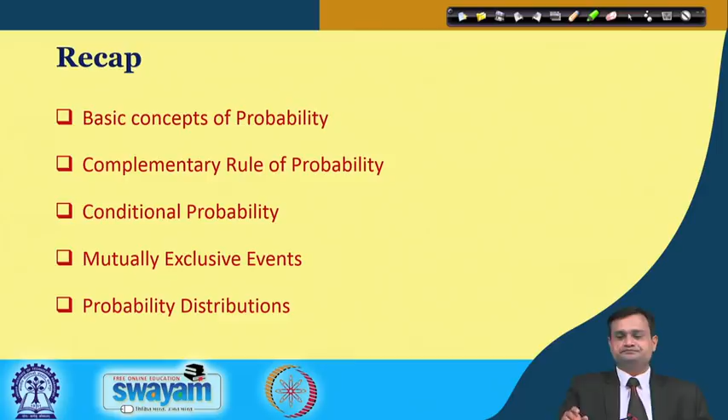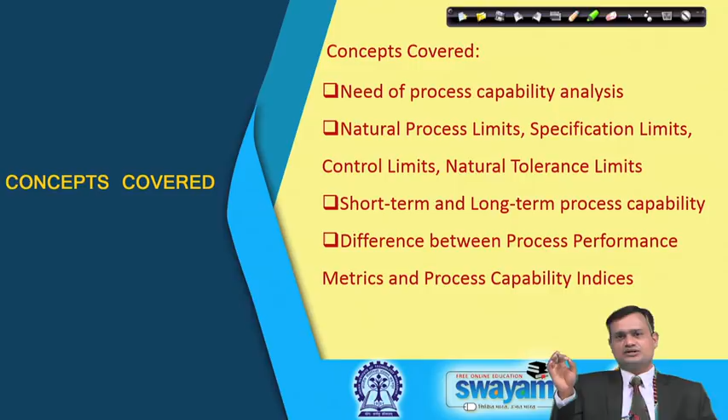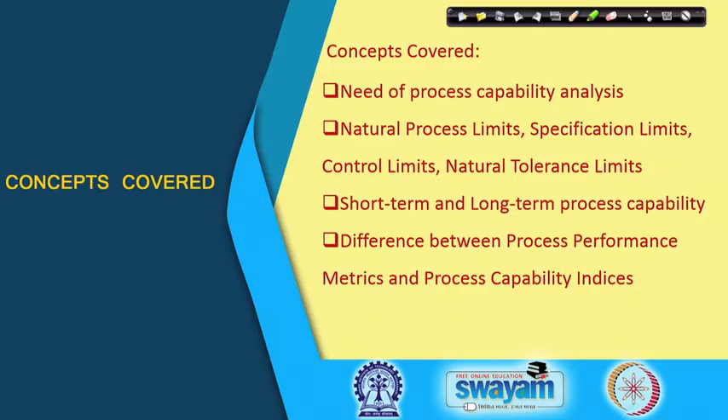This lecture will focus first on what is the need of process capability analysis, natural process limits, specification limits, control limits, tolerance limits, short term and long term process capability, and the difference between process performance metrics - we have seen many like DPMO, DPU and others - and if all those measures are there, what is the need of some other measures like process capability indices. We will see some of the important issues in this lecture.

So the first question: what is process capability? You can see the line in bold underlined. Process capability is defined as the inherent variability of a characteristic of a product. So when I am trying to analyze and capture this inherent variability of a characteristic of a product - characteristic may be diameter, thickness, whatever is your interest of measurement - then I am concerned about the process capability.

Typically it is expressed as 6 sigma, and sigma is the sample standard deviation of the process which is under statistical control. So it is very important to first check whether my process is under statistical control or not. If it is so, then only there is a point in conducting the process capability analysis. If there are any assignable causes which can put my process out of control and I am conducting the process capability analysis for such a process, it would be misleading.

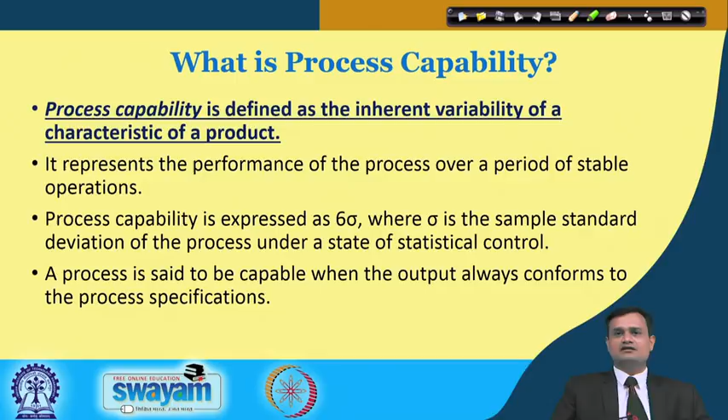So first I must bring my process under statistical control, and then I should see what my present process capability is and how it can be improved. A process is said to be capable when the output always conforms to the process specifications.

Why to study? The reasons are many. Just to summarize a few: predicting so as to hold tolerances. Many times designers give the tolerances, but my processes are not capable enough to meet those tolerances.

In this case, I can have an idea of what is the capability of my process and to what extent it can meet the tolerances defined by the designer.

Assisting developers and designers in selecting and designing the processes, because now you know what is the process capability. Establishing interval between sampling is also very important. I want to draw the sample to analyze, but I must see what is the stability of my process and capability. This gives me a fair idea about deciding the interval between the samples.

Specifying requirements for new equipment. So you want to purchase equipment to meet certain standards and produce a product with certain specification. It is important to see what is the capability of this particular process, basically an outcome of a particular instrument. Selecting between vendors.

This is a very important point. Do not think that the final product, if Maruti is selling to a consumer, is just an outcome of Maruti company itself. Maruti purchases components from various suppliers and vendors, and it is important for Maruti to see how capable their processes are. If their processes are not capable, they are producing more defectives, parts are costly, or the parts are of lower grade, and when this is passed on in terms of cost and quality to Maruti, it will have an impact on the final product price or the quality.

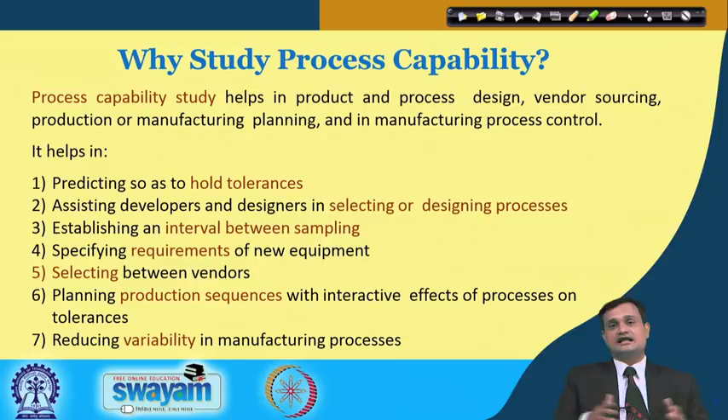Sixth, planning production sequence with interactive effects of process on the tolerances and reducing variability in the manufacturing process. So there are various reasons why one should conduct the process capability study, and there is a trigger for when I should really go for process capability.

Prior to taking delivery of any new process equipment, this is the first prerequisite requirement that I should conduct the process capability study. Second, before approving newly installed process equipment for production use, let me first see the process capability and then go for full-fledged production.

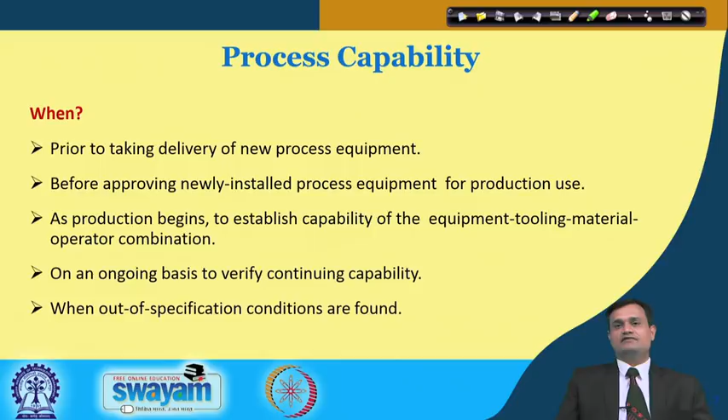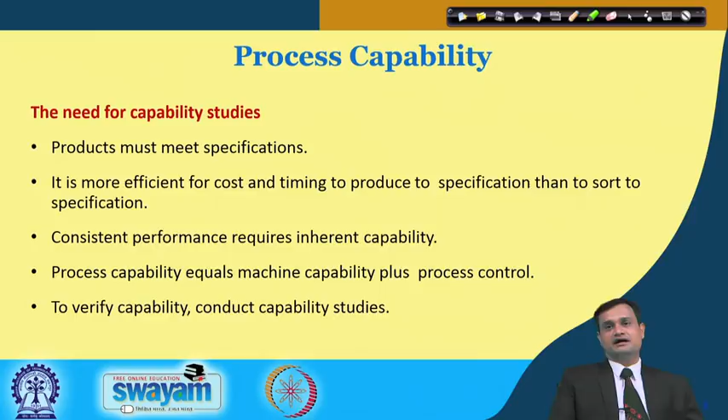As production begins, to establish capability of the equipment, tooling, material, operator combination, this study is required. On an ongoing basis, to verify continuity or continuing capability, process capability analysis is necessary, and also when out-of-specification conditions are found. So we have seen the need of process capability, basically to understand better how my processes are capable of meeting the specifications, and if there is any shift in the process mean, we will see its effect through figures on my defect rate or the generation of defective items.

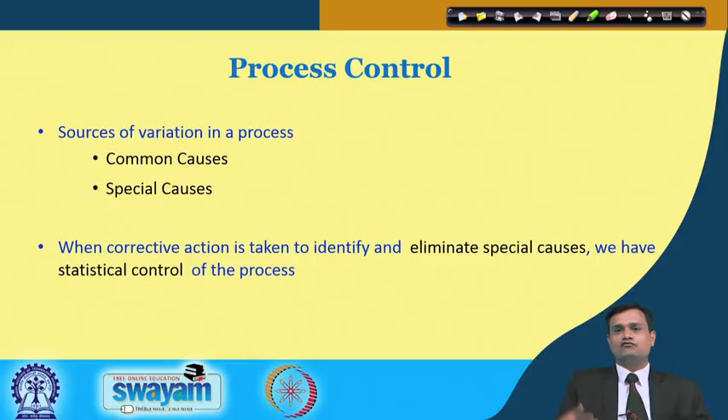Before we extend our discussion, there are some basic concepts to appreciate. When we say statistical control or process control, always remember you cannot avoid all variations, and typically the variations are primarily because of common causes and special causes. If there are variations because of common or chance causes, such variations are within control and I do not bother much about them. But if there are special or assignable causes, then some corrective action is required, the process needs to be readjusted or corrected, and then only can I go for the process capability analysis.

This is very interesting to appreciate. Just see that you have the process typically out of control. This indicates that there is a special cause present. Why is this out of control? You see there is a mean value, a mean line, and this process is drifting from this side to that side, with also a huge variation in terms of process variability.

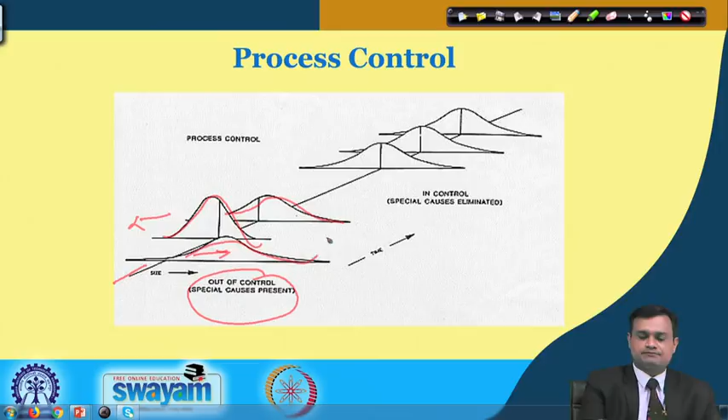If you look at the process in control, then more or less you will find that process variability remains the same and your process is centered at a particular desired value. So you have the process which is in control, and a process which is out of control, and it is necessary that first you bring your process in control and then only go for the process capability analysis.

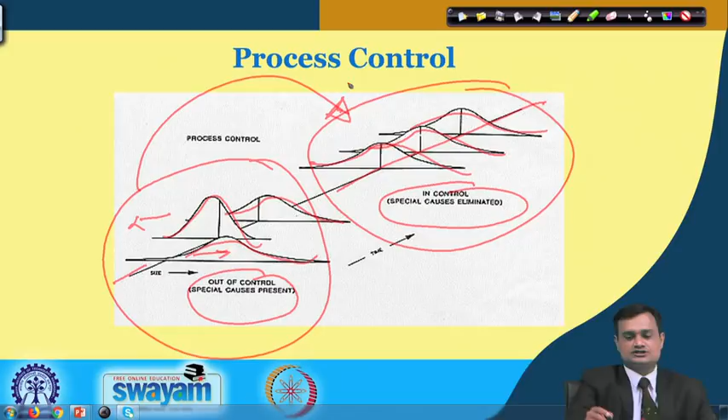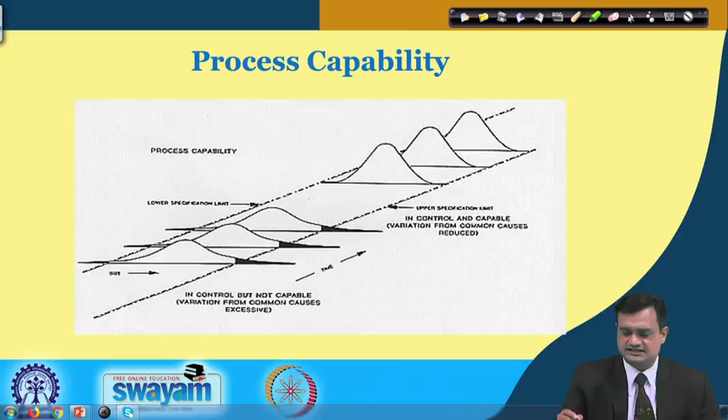So, I hope this would have cleared your understanding on what is the process which is in control, statistical control, and it is capable or not capable. Process capability basically indicates the performance of the process or the capability to meet the customer expectations, and it measures the uniformity of the output, covering both natural inherent variability at an instant of time and variability over a period of time.

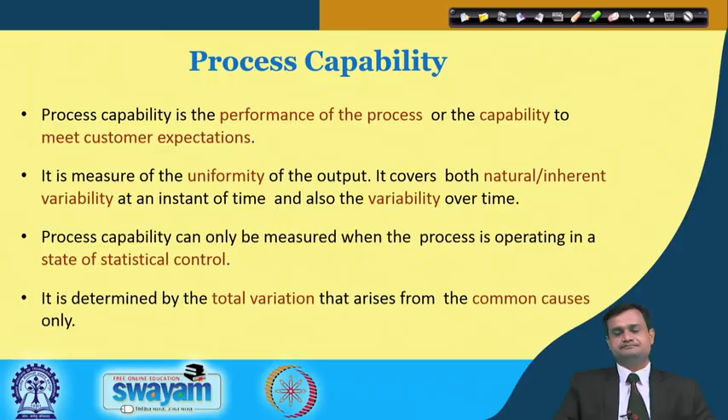Now, I would like to introduce a couple of important terms. Natural process limit is one of them. Natural process limits are known by several names, typically natural process variation, normal process variation, natural tolerance, but basically they convey the same thing.

Typically, in all cases it's plus or minus 3 sigma limit, 6 sigma is the total spread on either side of the mean around the process average, and such limits basically include 99.73% of the process variation and are typically said to be the voice of the process. If you recall, we discussed voice of the customer. So, that is okay, the customer can have a voice, but your process also speaks, in terms of control, rejections, defectives, and we need to capture this voice also.

So, Shewhart, the godfather of statistical process control, quality control, proposed plus or minus 3 sigma limits as an economic trade-off between looking for special causes for points outside the control limit when no special causes existed, and not looking for special causes when they did exist.

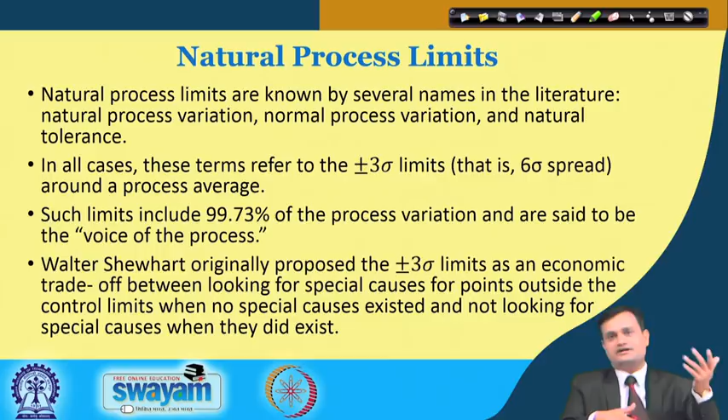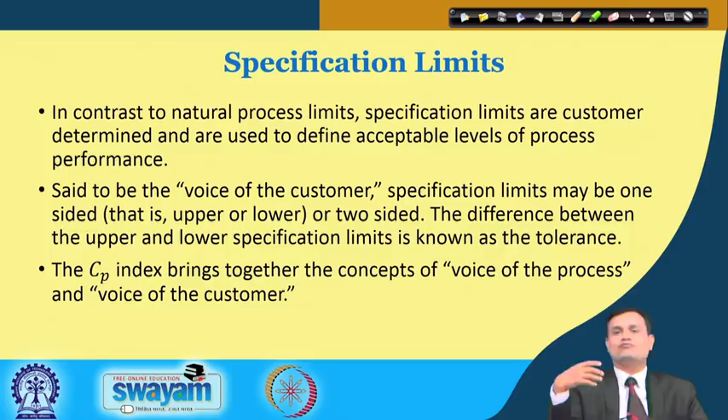Now you have another term, that is specification limits. Specification limits are determined by the customer, given by the customer, and these are used to define the acceptable levels of process performance. My process should deliver the product which is acceptable to my customer, and my customer believes in the specifications. So I must have the process, voice of the process, capable enough to meet this voice of the customer, that is the specification. So there is a one-to-one relationship between VOP, voice of process, and VOC, voice of customer.

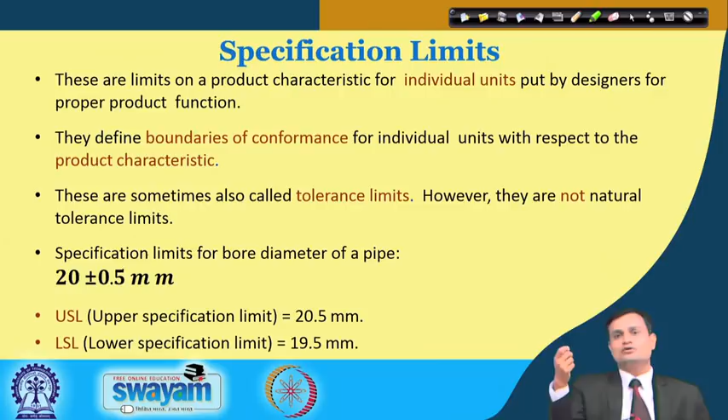So just see the example to clarify specification limit. There are limits on a product characteristic of individual units put by the designer for proper product function. Suppose I say the diameter of the pipe is 20 plus or minus 0.5 mm, then the upper specification limit is 20.5 mm, and the lower specification limit is 19.5 mm. My process must be capable enough to produce the pipes as per such a specification.

Now there is another issue, sometimes we talk about control limits, sometimes specification limits. What is the difference? Specification limits relate to the need of the customer, given by the customer, which are analyzed and built into the design. These are limits on a product characteristic for individual units put by the designer for proper product function.

Now, if you see the control limit, they identify the variations that exist between samples or subgroups of measurement, and they do not apply to individual units unless the control chart is for individual measurement. So, in summary, control limits reflect the variability of the process. I must try to control the variability of the process, and they have no relationship to the specification limit which relates to the need of the customer.

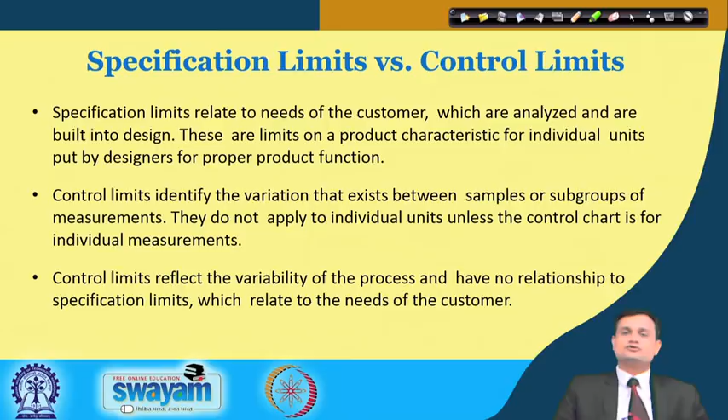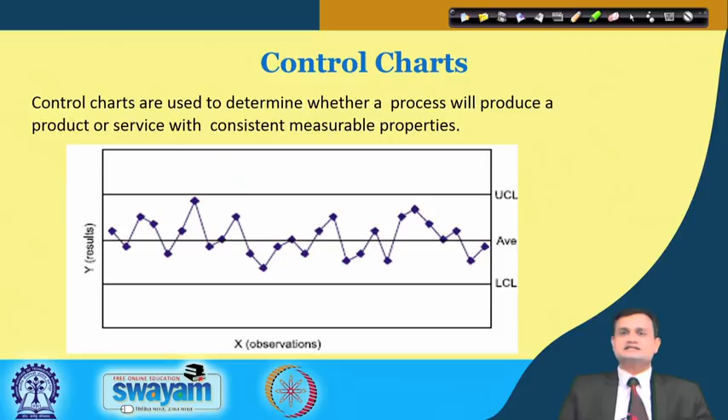We will see in detail the control charts, but since we are discussing control limits, let me say this is a typical process where you take X observations and get Y results. I would set an upper control limit, lower control limit, and average, and so long as the variability, as seen in the plot and data points, stays within this limit without depicting a particular pattern, I can say my process is within statistical control.

So you have control charts for variables. We have a session on this. X bar chart and R chart are used for variables to monitor different parameters. X bar and R charts reveal different problems - you can have statistical control on one chart and out of control on the other. Let's look at the figure here.

This figure depicts a process typically shown by a bell shaped curve with a mean of 16. I have another process with a mean of 15.9. When I put the X bar chart and R chart together, I can see that on the R chart the measurements are within the limit, but on the X bar chart, this measurement falls outside the lower control limit. So there is a shift in mean detected by the X bar chart, not by the R chart. As we know, R is related to variability, X bar is related to the mean of the process, so this indicates a shift in mean.

If we see part B, I have a process described by a bell shaped curve with mean 16, and again mean 16 - there is no shift in mean. You will see the point falling outside the control chart on the R bar, indicating a shift in dispersion. My mean remains the same, but because of some reason the variability has increased - you can see in this graph the variability is different, here it is less, there it has increased. This figure helps you understand and differentiate the utility of X bar and R chart.

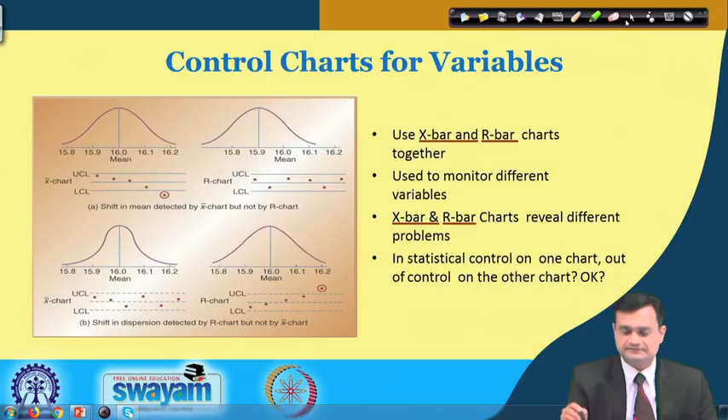So with control charts, as I mentioned, we typically deal with type 1 error and type 2 error. Type 1 error occurs when a process is thought to be out of control when it is typically in control, and type 2 error occurs when a process is thought to be in control when it is actually out of statistical control. Let's think more practically to appreciate the importance of type 1 and type 2 error.

Suppose there is a judiciary system and an innocent person is punished, declared guilty. This clearly indicates a type 1 error, because you are rejecting the part when it is of acceptable quality - you are punishing the innocent person when he is actually not guilty, and this is type 1 error.

Type 2 error is the reverse case, when you exempt the person, giving no punishment, when he is actually guilty. Many times it is difficult to see the trade-off between type 1 and type 2 error, and it is quite dependent on the context.

If you look at the judiciary system, should I accept a higher type 1 error or type 2 error? If you look at type 1 error, I am punishing an innocent person when he is not guilty - the societal cost is very high, and moral ethics will be diluted.

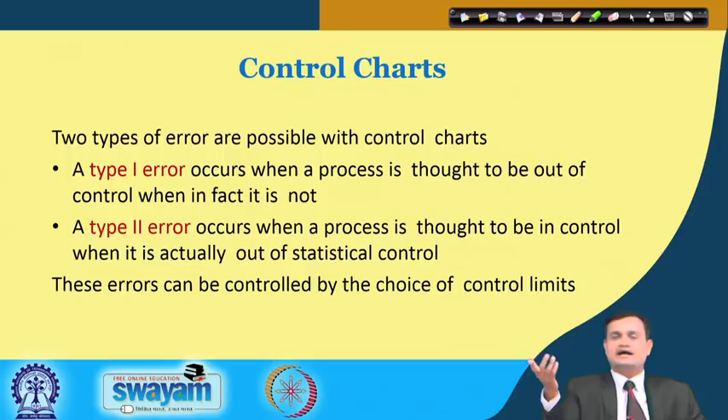So this is a trade-off and it is contextual. As I mentioned, Shewhart suggested the most economic trade-off can be achieved by having a plus or minus 3 sigma limit. Here we have compared specification limits versus control limits - you can see the lower control limit and upper control limit placed at plus or minus 3 sigma of X bar, specific to the sample, and here you have the lower specification limit and upper specification limit.

So please try to appreciate that the control limits are for the X bar chart, while specification is for individual values - these two are different things, do not get confused. Control limits are specific to the process, and their objective is to control the process. The specification limit's objective is to ensure that the parts I am producing satisfy the specification, which is basically obtained from VOC, voice of customer, given by the customer.

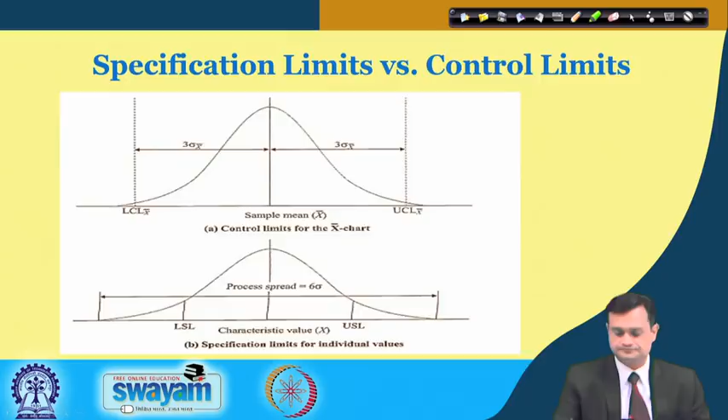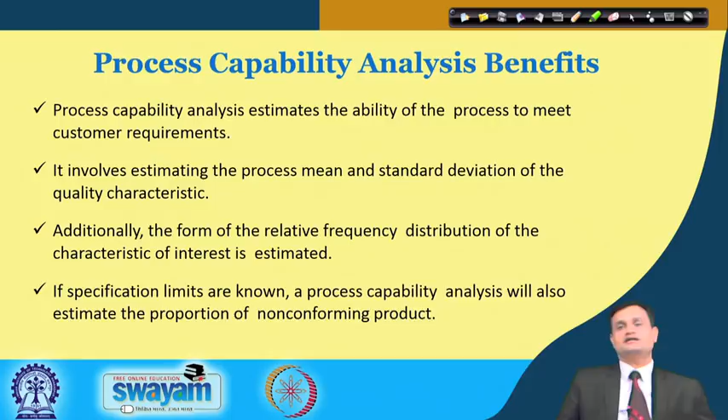The benefits we have seen are that we can be more confident in our process, and we can commit to our vendors and customers to what extent our processes are capable in meeting the requirement. Also, if we have a fair analysis of process capability, then we can take corrective action rightly, because the cost of scrap is much higher than the cost of rework. So many times, if altogether my components are going outside the control limit and I have to reject it, then it is better to take corrective action and put my process under the appropriate capability zone.

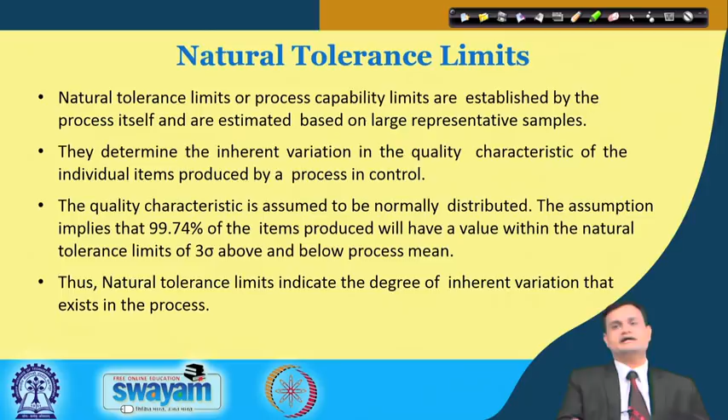There is another term called natural tolerance limit. Natural tolerance limit, or process capability limits - same thing - are established by the process itself and are estimated based on a large representative sample. Typically the assumption is that 99.74% of the items produced will fall within the natural tolerance limit of plus or minus 3 sigma, and this gives a good economic trade off. Natural tolerance limits indicate the degree of inherent variation that exists in the process.

So now you can see very well: upper natural tolerance limit or upper process capability limit, lower natural tolerance limit or lower process capability limit, and mu plus 3 sigma or mu minus 3 sigma is good enough to set my natural tolerance limit or capability limit.

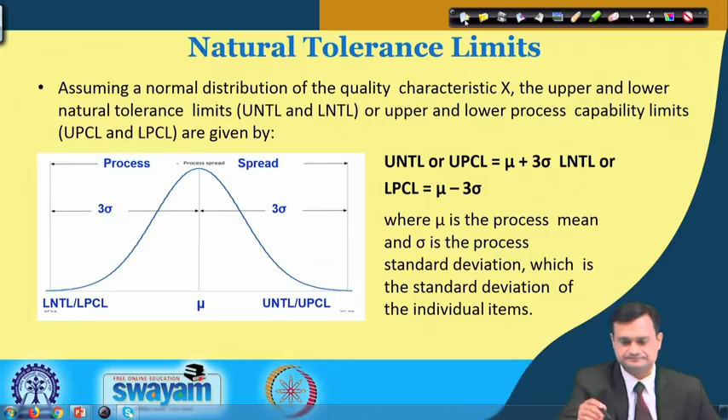So what we have checked our understanding with is mainly the bell shaped curve, the normal distribution, but you can have non-normal distribution, and in this case you need to find out the distribution of the data and ensure that the natural tolerance limits are so chosen that nearly the entire distribution is contained within those limits. Just to remind you, we have already discussed the relationship between mu and sigma through two different approaches: Chebyshev's theorem and the empirical rule.

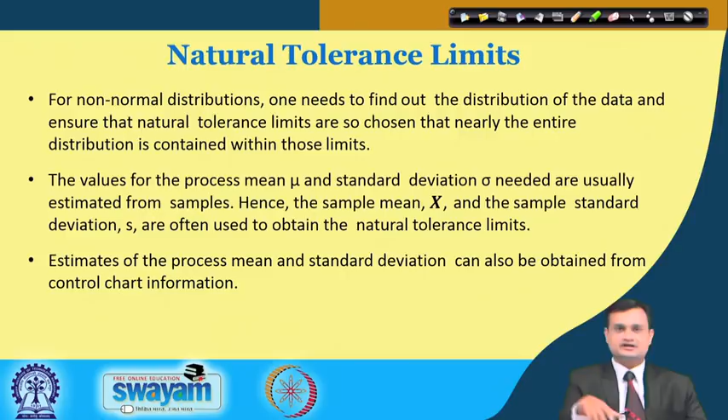You can appreciate the natural tolerance limit better through this example: let us say the diameter of a part has to fit an assembly and the specification for the diameter is 5 plus or minus 0.015. Samples are taken from the process in control, yielding a sample mean x of 4.99 and a sample standard deviation of 0.004. Now find the natural tolerance limit of the process, and would you consider adjusting the process center? That is the question.

So I have plus or minus 3 sigma as a rule of thumb. 4.99 is the mean of my sample, and sigma is 0.004. So what I get is 5.002 and 4.978, giving a process spread of 0.024. So for the current process, we would expect the diameter to fall between 4.978 and 5.002.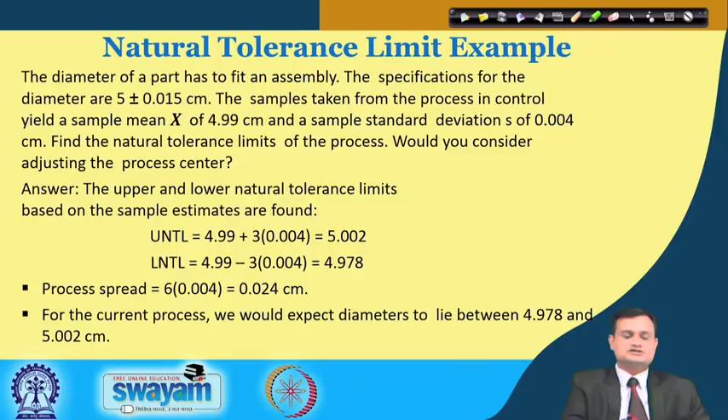Now just see here, it's interesting. I have upper specification limit 5.015, lower specification limit 4.985, upper natural tolerance limit 5.002, and lower natural tolerance limit 4.978. Now, given the mean is 4.99, if this is the present status of my process, you will see that this portion, highlighted in black, is indicative of defectives I am producing which are not meeting the lower specification limit. So this kind of process will have some defectives produced, and I should try to see that this can be avoided, because even if I go for rework the cost is high, and if I scrap, the entire value addition is lost.

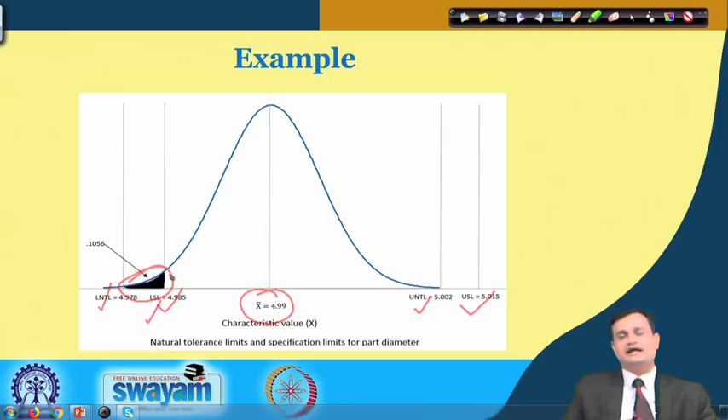Now I can take the example further. Z equals LSL minus x bar divided by S. Plugging in the values: 4.985 minus 4.99 divided by 0.004, which comes out to be minus 1.25. I can use the normal table and find the proportion or probability. So 10.56% will fall below LSL, and that I have to reject.

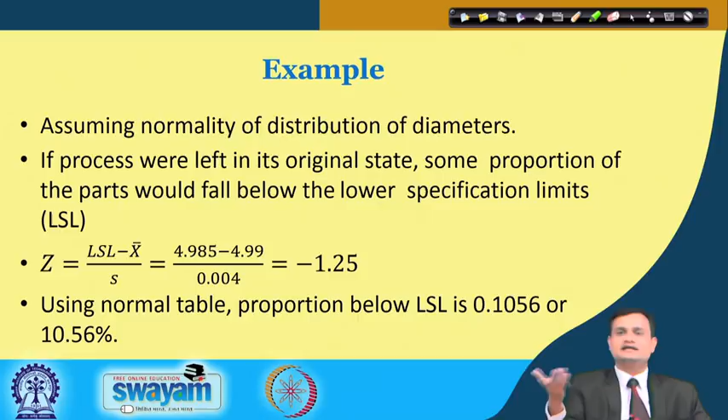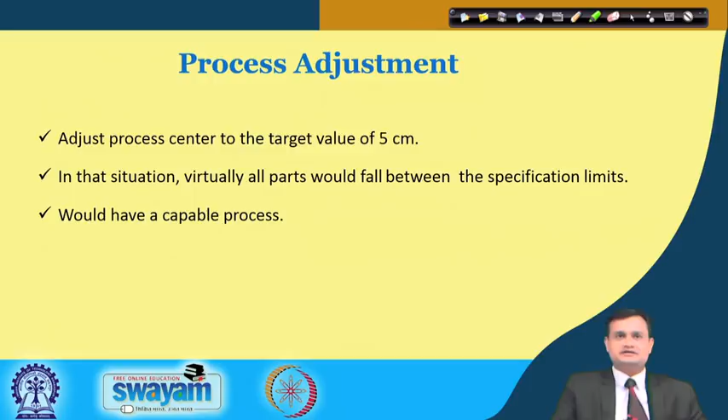So what to do now in this situation? Fine, I have measured, I have checked - now what to do? You have a couple of options. Number one, adjust the process center to the target value of 5. So you shift the process center, so that automatically your entire process gets shifted, and the probability of getting more parts outside the lower specification limit will reduce. In this situation, virtually all parts would fall between the specification limits and you would have a capable process.

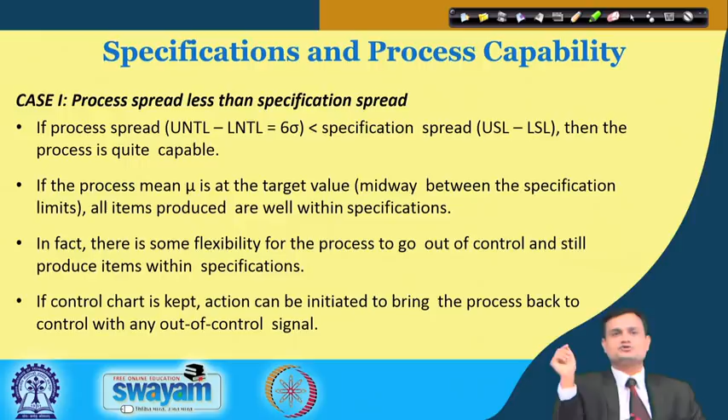So we can put it simply: in case 1, process spread is less than specification spread. So UNTL, upper natural tolerance limit, minus LNTL is equal to 6 sigma. If this is less than the specification spread, USL minus LSL, then the process is quite capable. We can see it further - process spread less than specification spread in all cases, and in the first case, process mean and standard deviation at target value.

Process mean and standard deviation are at the target value. Now the process mean has shifted a bit, but it is still within specification because it remains within the LNTL and UNTL. Here the process standard deviation has shifted, so you can see an increase in spread.

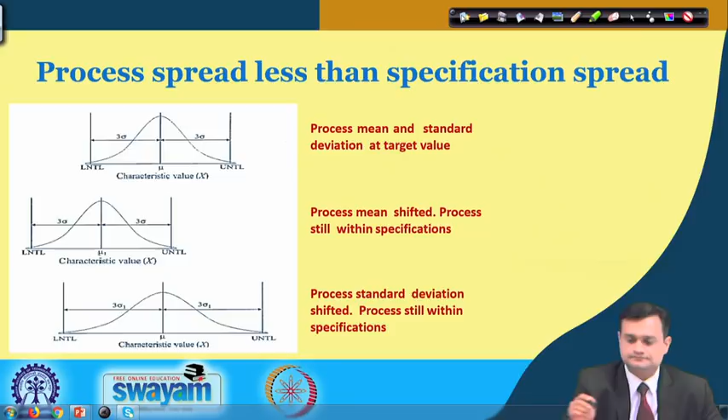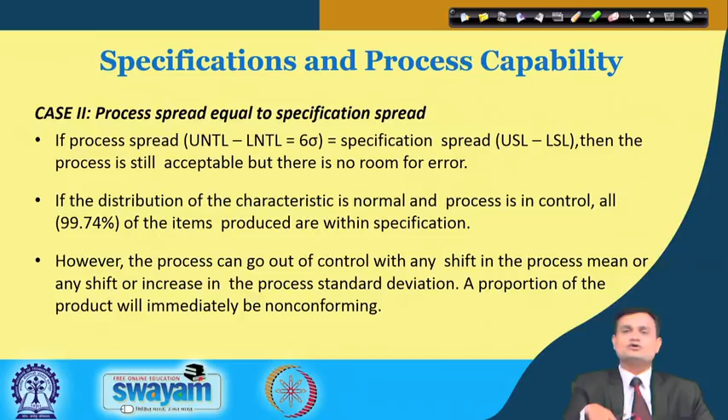Standard deviation has shifted, but the process is still within specification. So even with shifting in mean and shifting in variability, the process remains in control. Now let us describe case 2, where the process spread equals the specification spread. Here, UNTL minus LNTL equals 6 sigma, and this interval equals USL minus LSL.

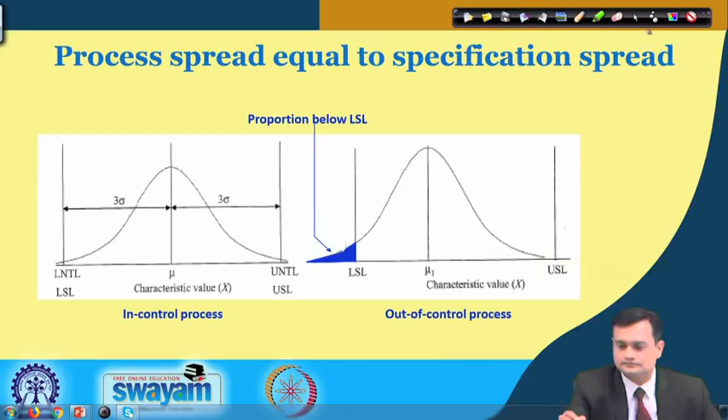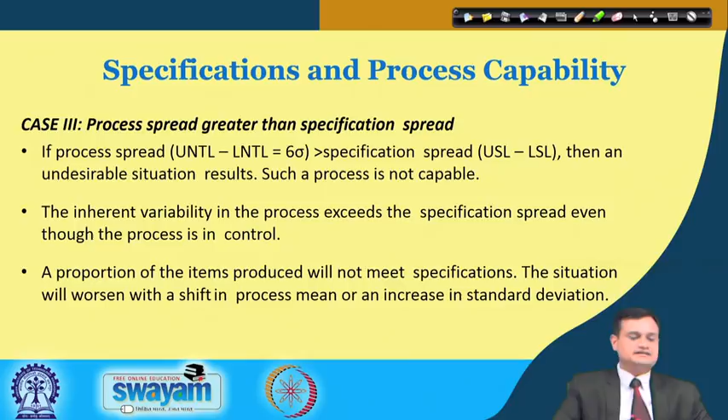Now we have case 3, where UNTL minus LNTL is greater than the specification spread, which is an undesirable situation. Here the specification limits are closer while the natural tolerance limits are wider. So whatever you do, the process is not capable and will produce defectives because the specification limits are closer. So now the question comes: what to do?

If this is the situation, what are the corrective approaches? When the process is neither capable nor barely capable, you have three options available.

Number one, explore the possibility of increasing the specification limits. Many times designers or customers are fascinated by specification limits that are actually not realistic or required. So can you really change or increase the specification limit so that it can meet your process capability?

If not, second, investigate measures to reduce the process spread. Try to make your process more centered around the mean value. Automatically your upper and lower natural tolerance limits will come within range, and you would be able to meet the requirement.

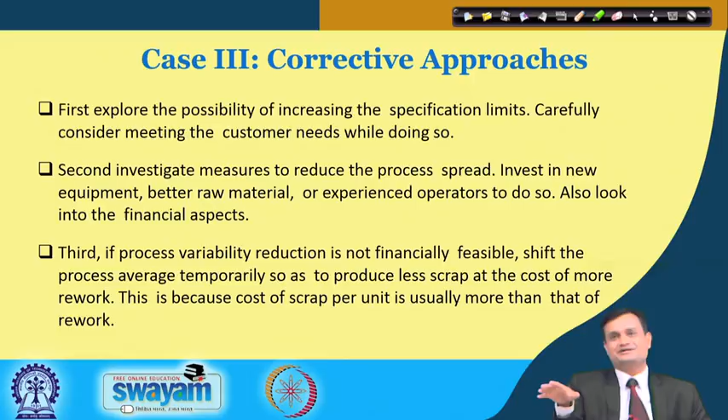Suppose you have produced components on the higher side, say oversized diameter with extra material. You can rework it and reduce it, so there is a rework cost. But if it is the opposite case, you cannot add material, you have to simply scrap it. In this situation, you shift the mean to the desirable side and try to temporarily reduce the amount of scrap, reaching a reasonable situation where the cost of rework is affordable.

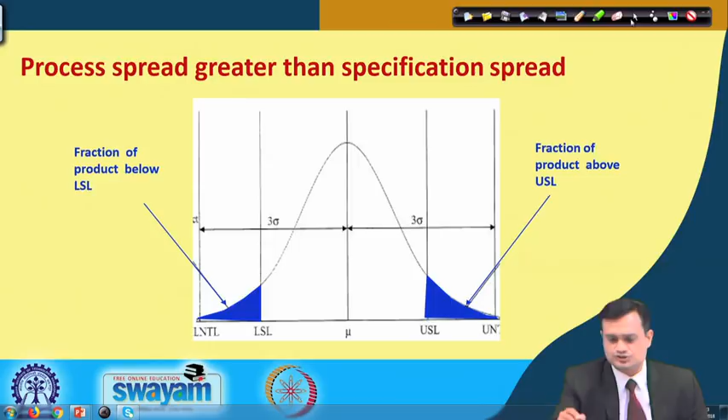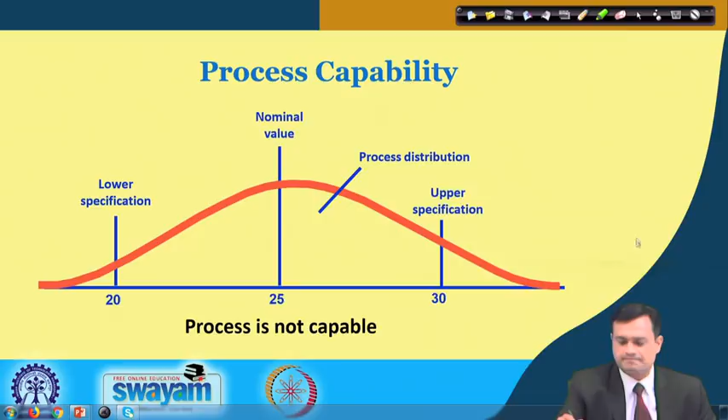So these are a couple of issues specific to process capability. When the process is capable, specification limits are wider and variability is very low, so even if your process drifts in between, you are in a comfortable zone. When the process is not capable, it will produce defectives. Now let us see how to estimate the process mean and process standard deviation.

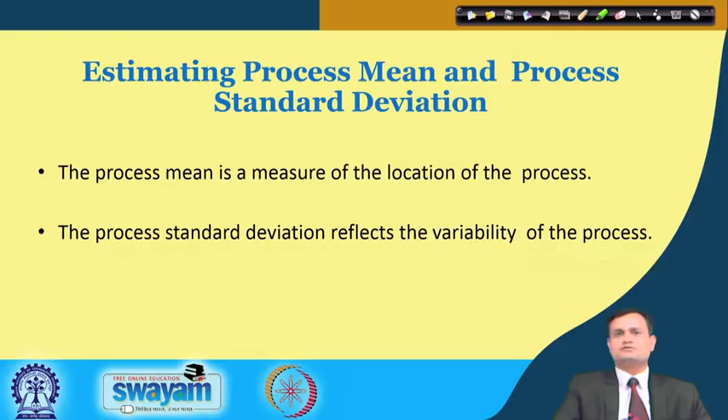Process mean is a measure of location of the process, and standard deviation reflects the variability of the process. Now there is something interesting to appreciate here: when we talk about process capability, it is short term versus long term.

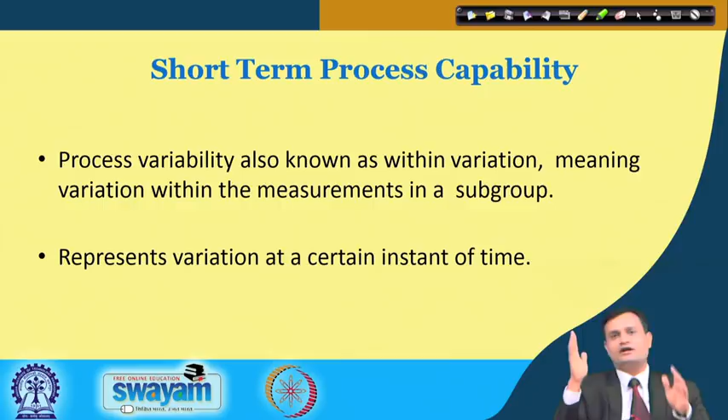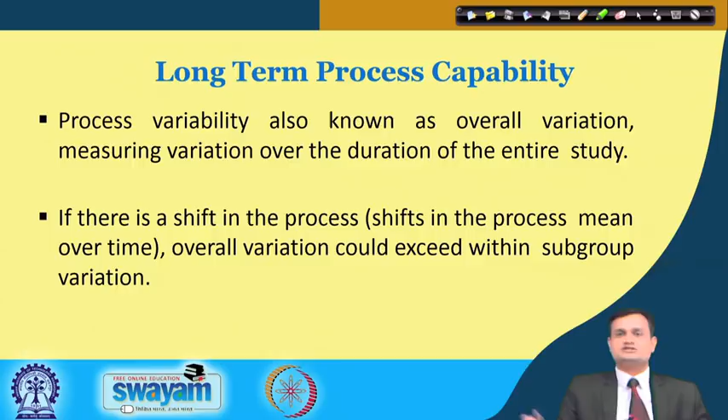When I say short term, it is basically within-variation, based on various subgroup samples studied at a particular instant of time — that is short term process capability. When you study it over an extended period of time, the entire process range is called long term process capability. Long term process capability is typically short term plus a 1.5 sigma shift, and this interpretation is based on the Six Sigma understanding.

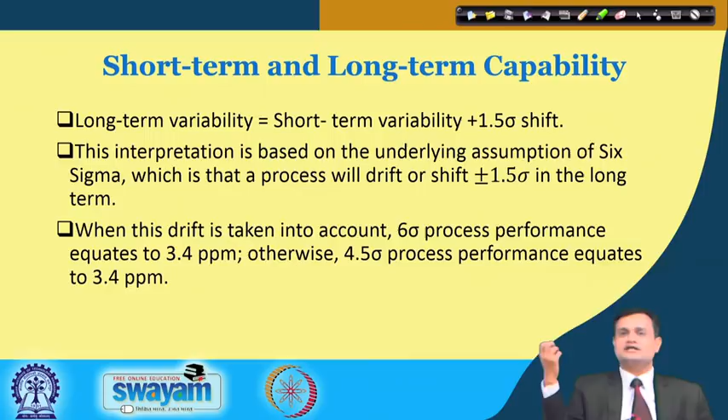We discussed in the basics that even if there is a shift of 1.5 sigma, my process should not produce anything more than 3.4 ppm, parts per million, as defective. You can see the dynamic process, and when I say short term process capability, it is specific to this particular domain where subgroups or samples are analyzed in terms of process capability. When I typically say the process capability for long term, then it is basically this long term process capability over the entire zone of the process.

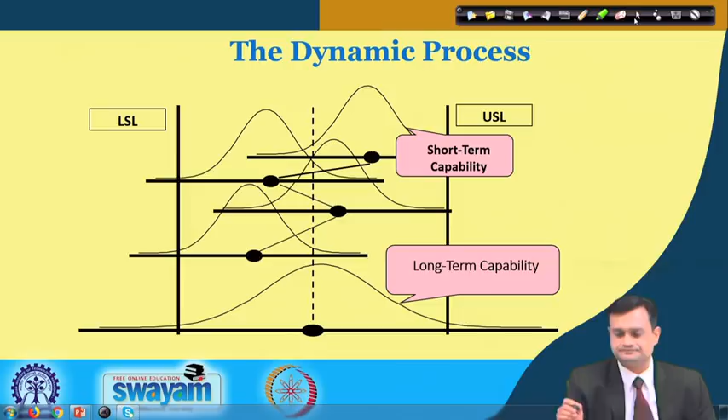You can also see in a very simplified version here, same thing. This is your long term process capability, and this is your short term process capability specific to a particular subgroup or samples.

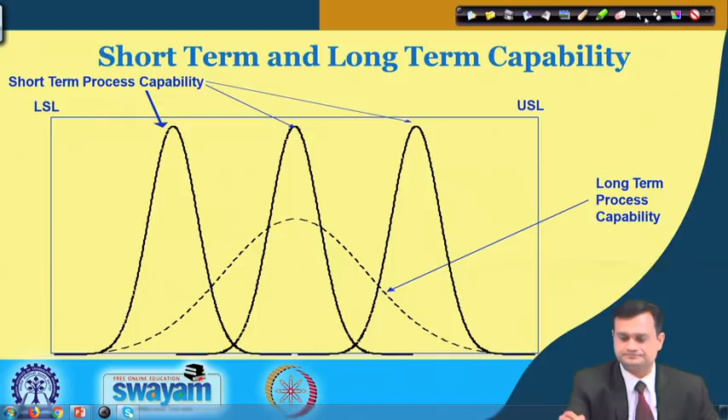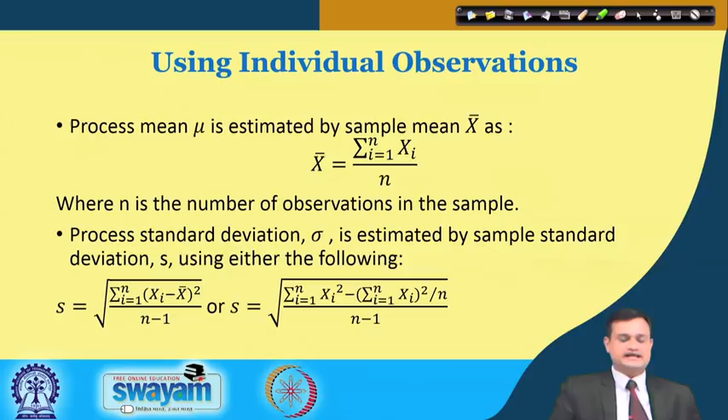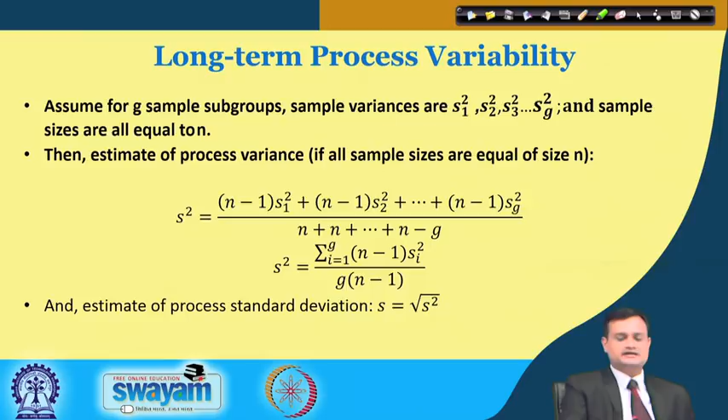So you can use these formulas for individual observation, X bar. You can estimate the value of sigma, process standard deviation, by sample standard deviation S using this expression which we have discussed. Long term process capability or variability is captured through S square, n minus 1 S1 square, n minus 1 S2 square, because you have different samples and hence the sample variability is different, and then you put n plus n. If it is separate, you consider n1, n2 and so on. This way you can consider the S square, and square root of S square is process standard deviation S, estimate of the process standard deviation. Long term process capability, the hat is basically a symbol for estimation.

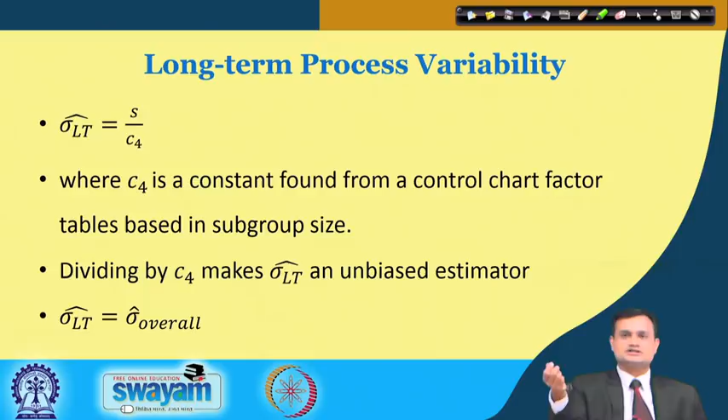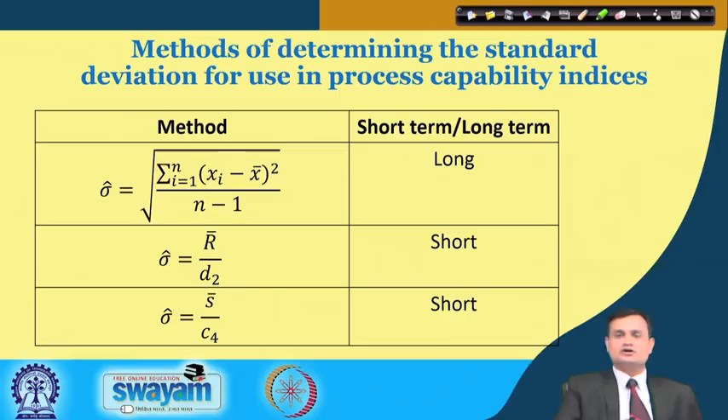I can make use of standard tables available in the majority of black belt quality control books, and they give some standardized values of constants like D2, which we have seen last time, and C4. So, S divided by the C4 constant, you can find the standard deviation for long term process capability study. Similarly, mu is X double bar, R sigma estimate can be determined through R bar divided by D2, and you have various methods of determining the standard deviation for use in process capability indices. It could be for long term and short term. So these expressions we can easily use.

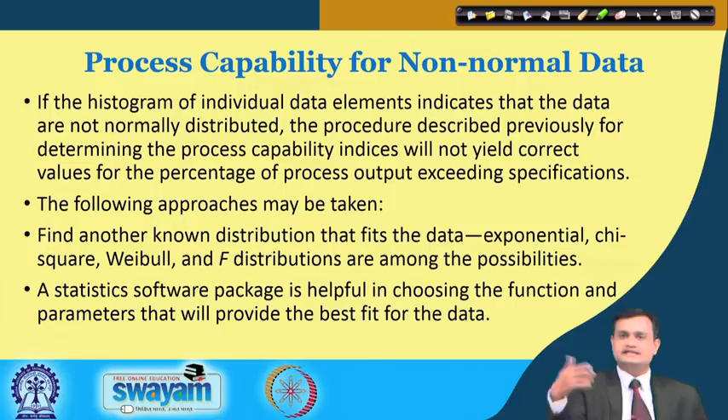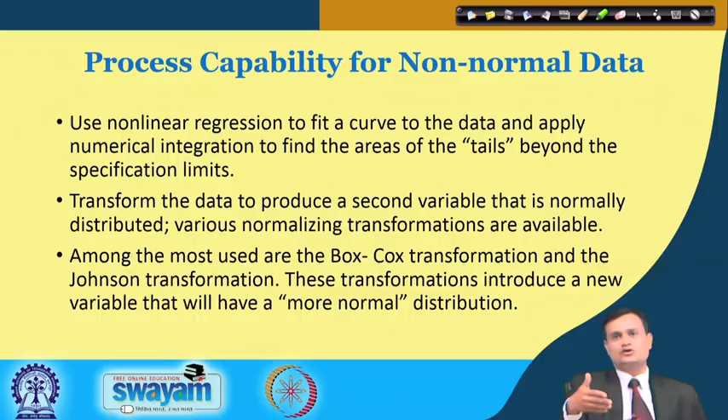We can also conduct process capability analysis for non-normal data, but first we should apply some transformation to convert my non-normal data either into normal form, or directly use some mathematical equations or transformations to conduct the non-normal process capability, which we will see in the coming lecture. So, for process capability, Box and Cox transformation, Johnson's transformation - these try to shift the data using some transformation from the present non-normal state to a normal state, and then you can conduct the non-normal, or rather the normal, process capability.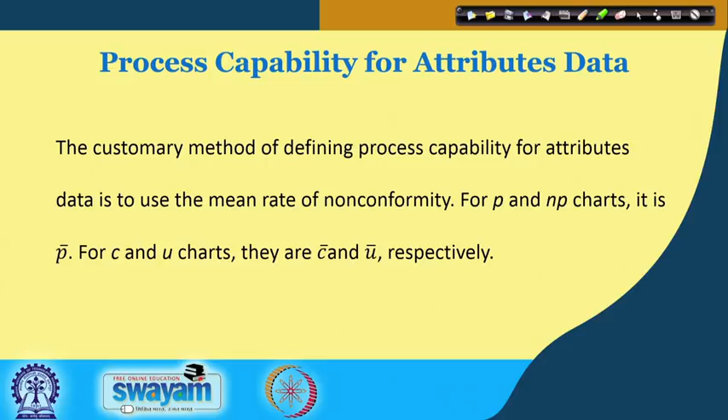You can have process capability for attribute data, typically the various charts we would be discussing later on - C, U, C bar, U bar - that will help us to conduct the process capability for non-normal data.

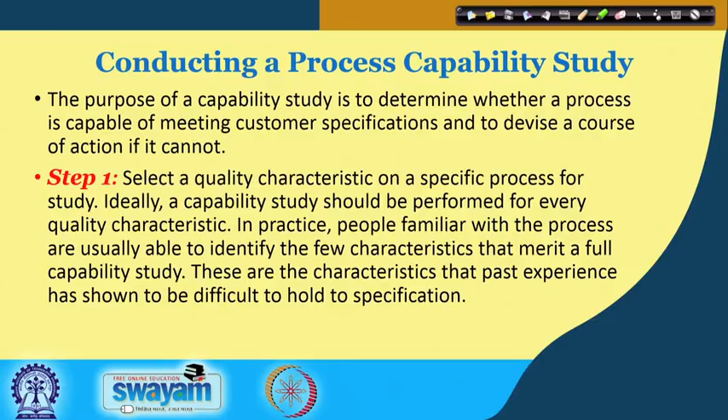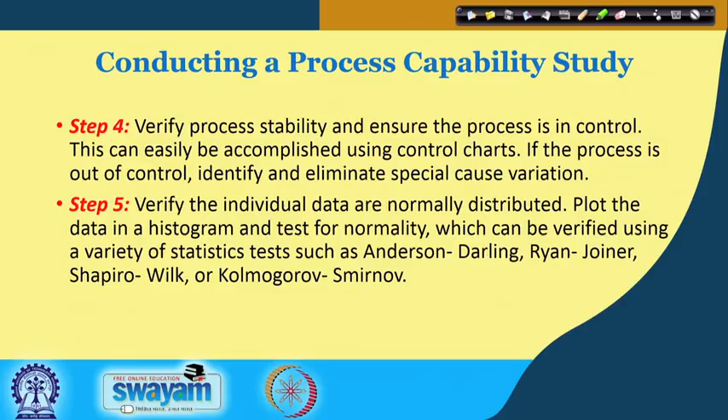So I am just summarizing the various steps for conducting a process capability study. Select the quality characteristic, confirm the measurement system, gather the data, verify the process stability - it should be in statistical control - verify the individual data, and using various statistics like Anderson-Darling, Ryan-Joiner and others, you can also study the histogram and check the normality of the data. Determine the process capability, apply the previously described method, and update the process control plan.

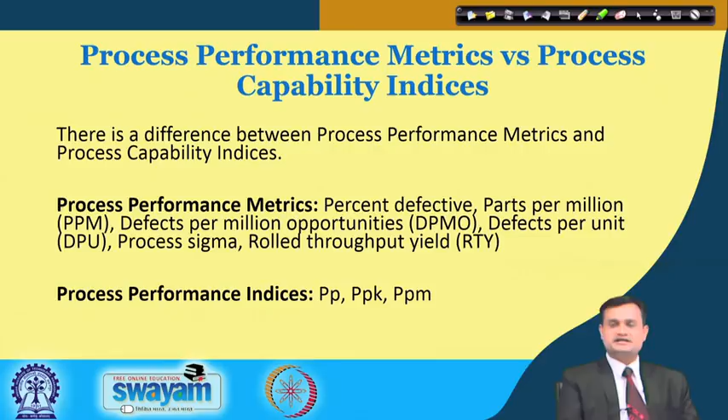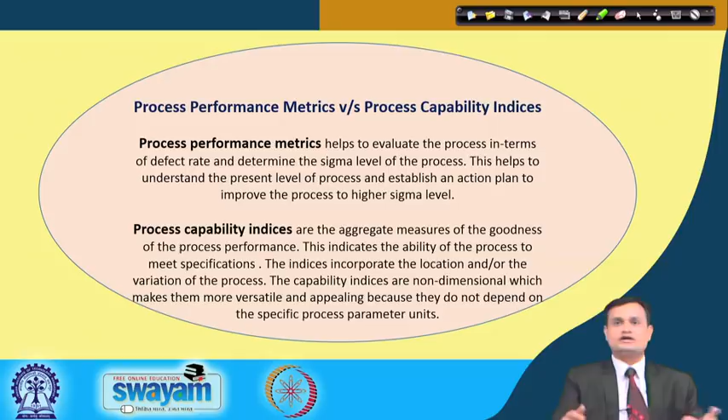There are various measures related to process performance and process capability. What we have studied previously - percent defective, DPMO, RTY - they are all basically process performance metrics. Process performance indices we will discuss in the next class: PP, PPK, PPM and so on. So the difference between these two is very simple. Process performance metrics help evaluate the process in terms of defect rate, whereas process capability measures check the goodness of the process performance, how capable it is. So we will discuss the various measures related to process capability subsequently.

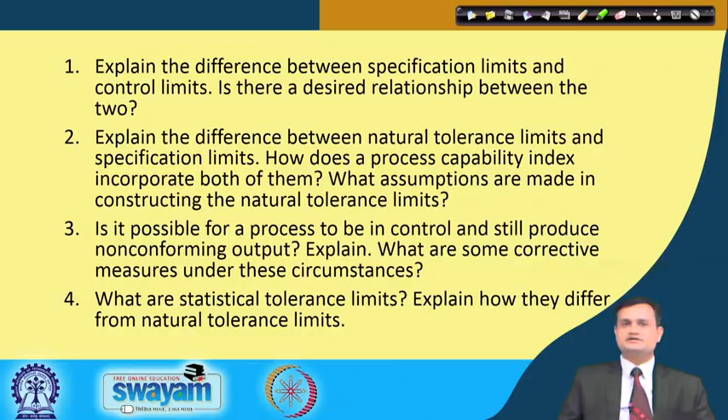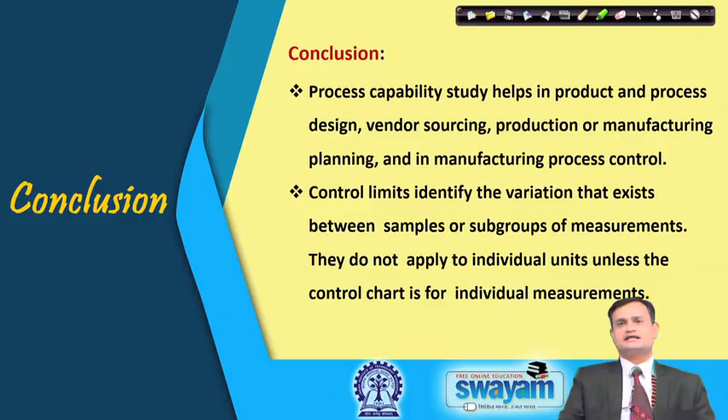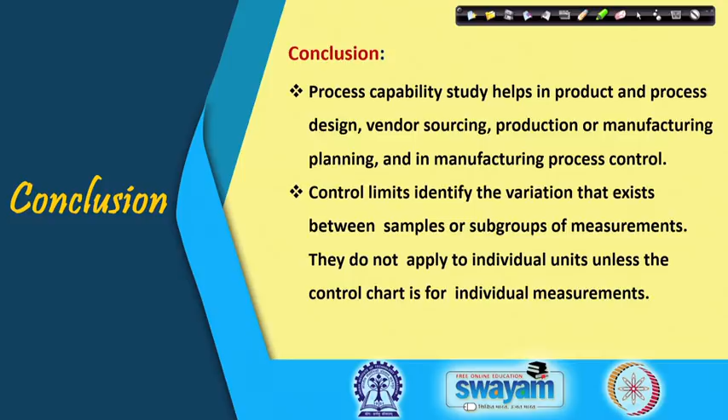Typically this capability analysis helps me judge the capability of the process, and only after that can I go for execution of the process and ensure that my process will produce good quality components. So, with this, thank you very much. Keep revising, keep introspecting, go into detail of the concepts covered. Be with me, enjoy.